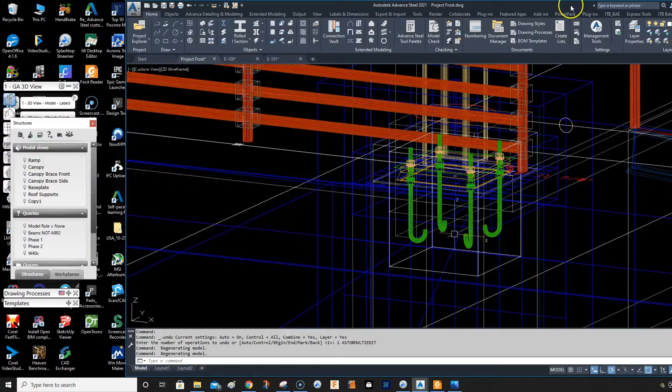So I have these anchors here which I was using for the job, J anchors, and I just want to change to straight anchors. But the problem is, we have this leveling plate down here, then you have 1.5 inches of grout here in the middle, and then you have this here. So let me see.

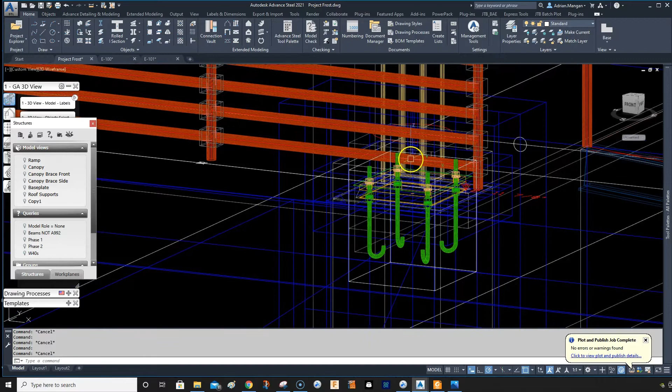We can see it a little better if I click on the view box or model view. Alright, so let's drag this up a little bit.

So they don't want to do J anchors because they didn't call for them on the drawing, so they want to change them. But the problem is I don't have an anchor that's extended up like this because I usually use the J anchors.

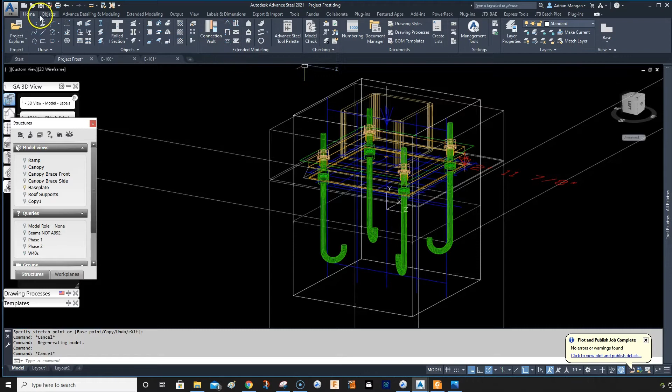So what we'll do is we want to change these to regular threaded anchors. So to create a new one, now I haven't done this in a while, so I'm not going to run through it first and then do it again. So I'll just do it the one time and we'll see if I can't get it right.

So it's not that difficult when you're creating a new one. You just pick threaded anchor. I'm going to duplicate it. And I'll call it basically the same, just change the name slightly. US threaded.

Sorry, my typing is not the best. Threaded, US threaded, and I'll call it extended. And apply.

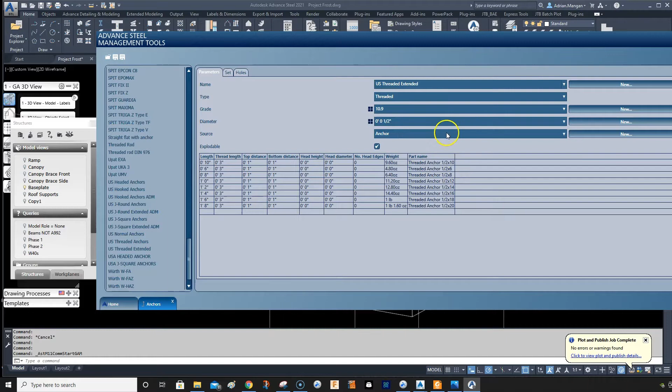And that's what we have here. So now it's a 1-inch bolt I want. At the minute this is a 1/2-inch bolt. There's the 5/8. Is the 1-inch. So this is what I want.

So now you can see the length of the anchors are here, and then the top distance is here. So my problem is my top distance is not enough because I need 1 inch for the plate, 1.5 inches for the grout, so that's 2.5 inches. I need another 2 inches on the top, so I need like 4.5 inches top distance.

So let's see, I don't know if I can remember this correctly. I want 1 foot 8 embedment, so it's probably going to be close to 2'6". I'd probably have to create a new one, but for now let's do the 2'6" one, and we'll create the top distance. We could make it 5 inches probably, so 1.5 inches, an inch is 2.5, 2, so let's make it 5 inches out the top.

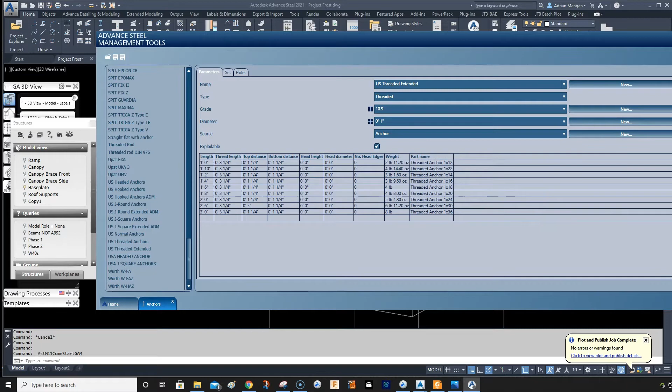And let's see what happens when we do that. So we can apply, click on the apply button over here so you can't see it. So I clicked on the apply button, so 2'6", so it should be good, I think.

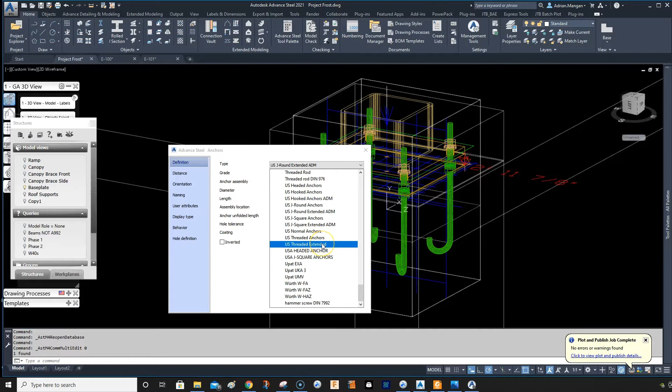And let's minimize that, update defaults, and let's come in here, and we want to go to threaded, extended. We're going to go 1-inch bolt. So as you can see, we're not extended, but we have not picked the length that we have edited. So we edited the 2'6".

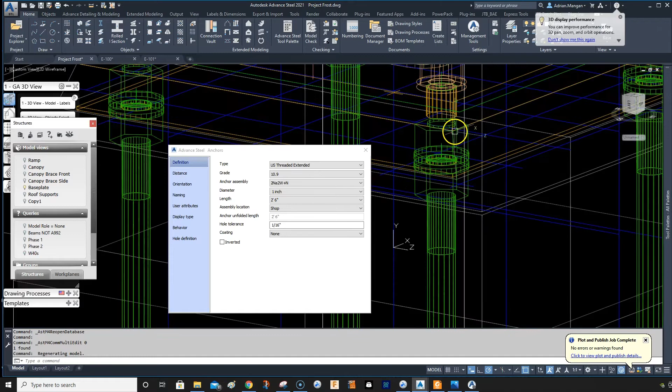So it's not extended because the one that I edited was the one with a nut and a washer and a nut, which is not exactly the one I wanted to do, but you can just see. So that just gives you an idea of what you want to do.

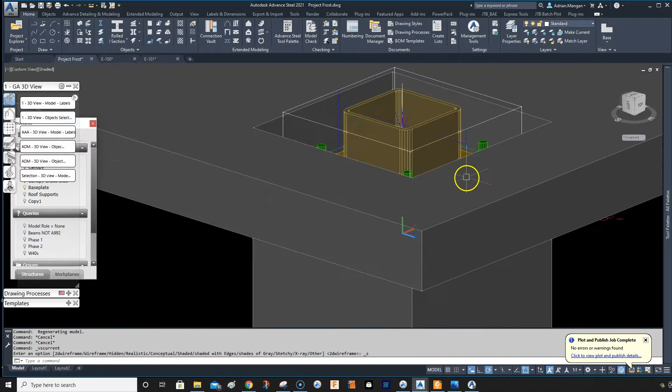So these nuts also are not the right size. I'll have to change these because these were 3/4 nuts. These are just out of the library, so out of the special parts.

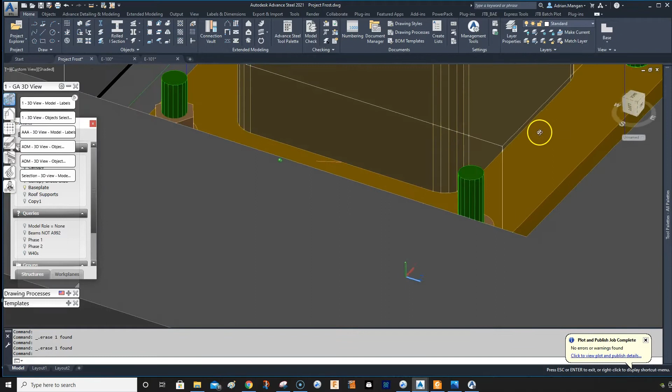So I'll delete these also, and I'll add new nuts and washers here on the top, because we're limited with the amount of nuts and washers we can add through the macro. So I don't know if this helps anyone.

So basically you just duplicate and then you can change your entries in here. So what I want to do is I'll change all of these. I mean, I don't know if I want to change them all to 5. I'll probably change these ones to 4, the shorter ones, because I'll probably only use them on a thinner plate. So let's say we'll do that one 4, and we'll do this one 4, and then we can do this one 5.

And we'll do the rest of these 5. So you can change all the other stuff here as well if you want. I recommend not changing too many things. You can always delete this afterwards.

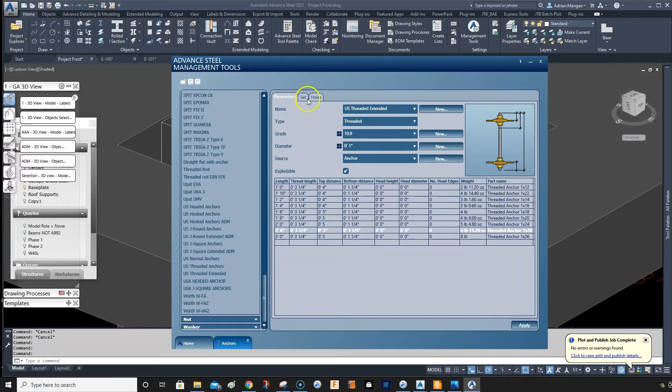So if you see, if I go to set, you can see that this is the one I did. When I copied it, it was a 1 inch here. I edited the 1 inch, and the set was nut 2 washer.

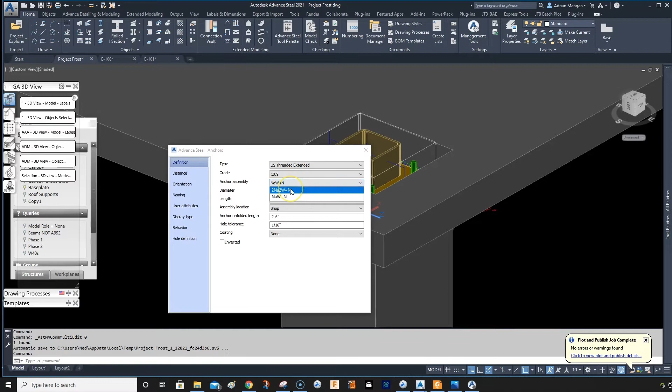So let's see if we do... what was the other one? 2 nuts and 3 washers. Let's see what the other one was. 2 nuts and 2 washers and a nut.

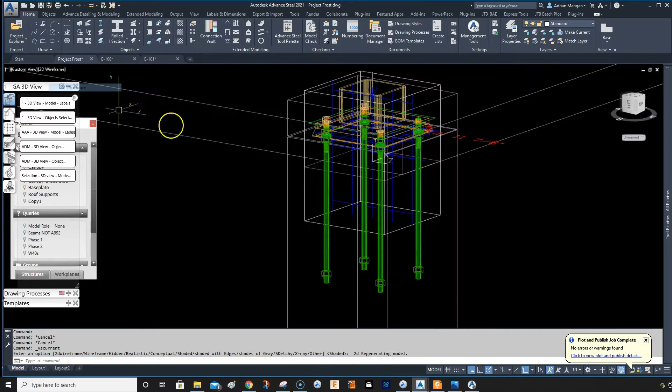Yeah, that's not what I want anyway. So, sorry, let's just go back, let's change this back, and you can see it just extends up. So, is my nut and washer on the right side?

Yeah, I'll add another nut and washer on the top and another one on the bottom. So I hope this helps. It's an easy way to create long extended anchors quickly. The only thing is it'll just do it for each size, so you'll have to go back in and edit each entry if you want.

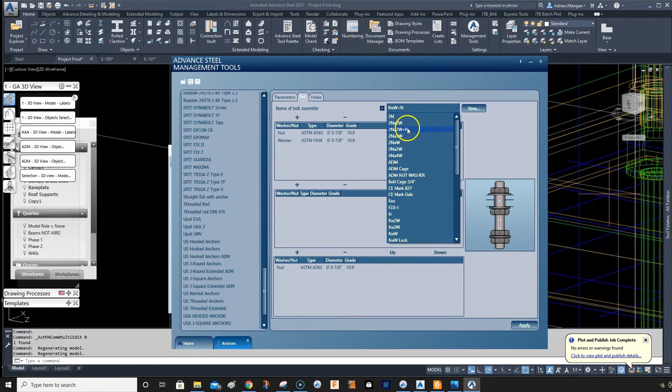So if I want to do a 7/8 bolt, come here to your 7/8, do your set. And if we change the set to 2 nuts, 2 washers, and a nut, then go back to our parameters, 7/8 inch threaded anchor, and top distance now.

So we'll change these to 4, right? Let's just see if this works. Change these to 4.

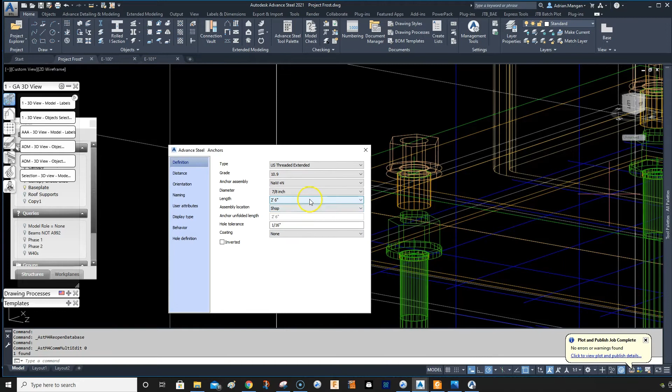And now you can see it didn't extend, but the reason it didn't extend should be because I didn't pick this one, which was the one I edited. So you can see that fixes that.

So that's a quick way to create your anchors, and just remember each one is separate. So, you know, it depends what nuts and washers you have on them.

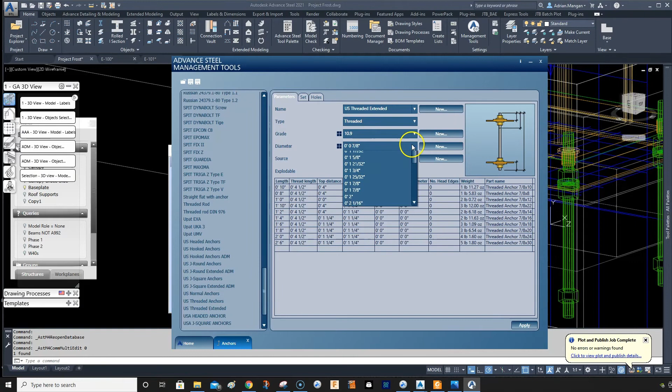I guess one last time I'll try and set up the one that I actually want. So go back to the 1 inch. This was the one I edited already. You can see the top distance is 0 there, whatever I did wrong. So let's fix that.

So let's fix that. Top distance good, bottom distance don't really care. It doesn't really matter that much.

So 1 inch, I'm going to go to the set and pick 2 nuts and 2 washers. Go back to the parameters. You can see all these values have changed. So these are associated with the nut and washer. So I will want to go back in and change these ones to 0.

Now, I don't remember where I stopped with the other one. Did I stop at 1 foot 4?

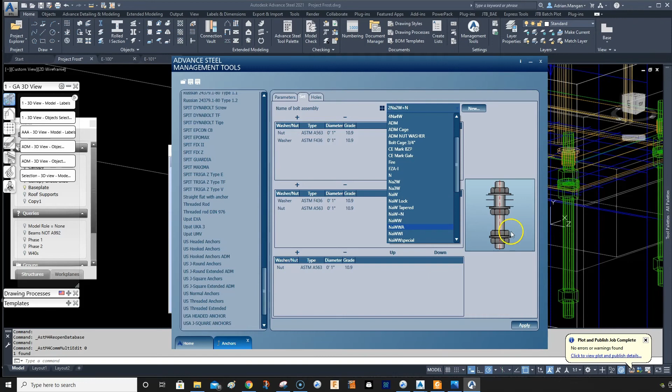So let's see if I go set, and let's go back and check the other one. What was it? Nut and washer? Nut and washer, right? Not two washers. Nut and washer, I can't even remember. So it doesn't really matter, I'll go back and check it in a minute.

And so what we want to do now is I want to go to my 2'6" anchor. That was the 2 nuts and 2 washers. So apply that change. Come in here, I'll close this, I'll update, I'll click on this.

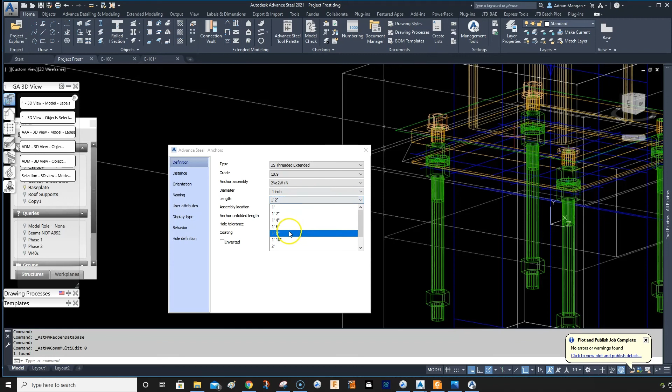Let's do, we're in the right anchor, we want to go back to 1 inch, 2 nuts, 2 washers. I did not edit the 1'2" one, so if I go up to the 2'6" one that I edited, you can see it extends. So that's what I want.

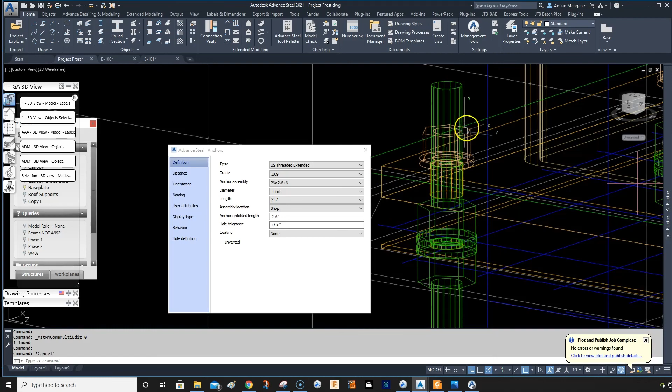So they want a nut on the bottom, they want a nut here, and I'm going to add a nut here out of the special parts. So generally this nut may not be used, it probably is going to be taken out to put on top here anyway, but we'll put 4 nuts on it, that's what they want.